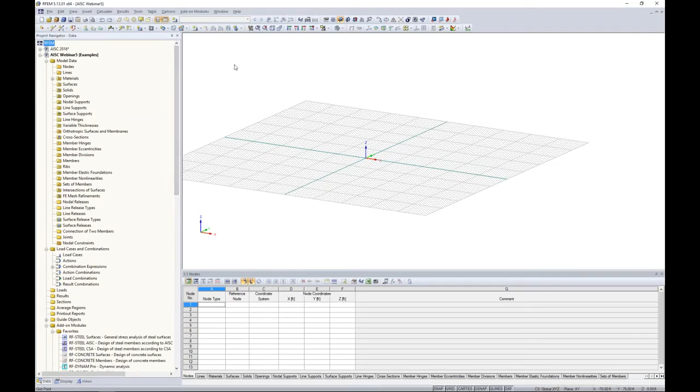So to begin with, we want to start off with drawing a truss. Now, we could normally go in and create our members individually and snapping to different points, but under Tools, Generate Model Members, we have several structure generators here: 2D frames, 2D trusses, 3D frames and trusses. We can even generate stairs. So we'll start off with a 2D truss.

And up pops our dialog box, and you'll notice that we have many different options when it comes to truss design. In addition, you can specify how the diagonals will be laid out, or our web members. So if we take a look at some of these different options, they will go ahead and update depending on which selection we've checked here. So we'll start off with this second selection, and our diagonals will be the default for this first selection.

The parameters is just our geometric information. The number of bays, we can set this as 6. The total length, which would be the span length, we'll set this as 50 feet. The total height is going to be measured right here at the center line. That can be set to 7 feet.

Now we have a couple other options here. We can lower the lower chord member here by a certain distance. For example, if we set this to 10 feet, you'll notice how this picture changes. Same goes for elevation. If we make some changes here, then our picture is updated for how our truss will be generated. So moving on, the cross sections and member types.

So we must define the cross sections for our chords, both upper and lower, as well as our diagonals and verticals, or our web members. The program's telling us that we need to create a new cross section. So for this, we will open up our cross section library. You can see here that we have many different cross sections. For today, we'll begin with the rolled sections, and in particular the HSS.

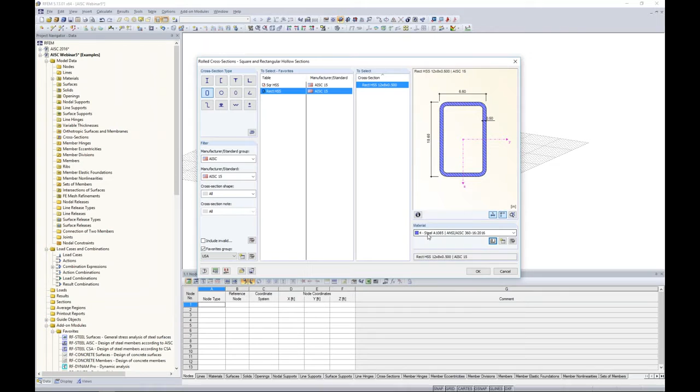So once I've created this material, I can choose it from my selection box here. We click OK, and we click OK once again. Now, that same material and cross section is populated for all of my members. Well, for the diagonals and verticals, I actually want to create a new cross section type, again under HSS, under my favorites group USA, and this time I want to choose a square HSS 5 by 5 by 0.375.

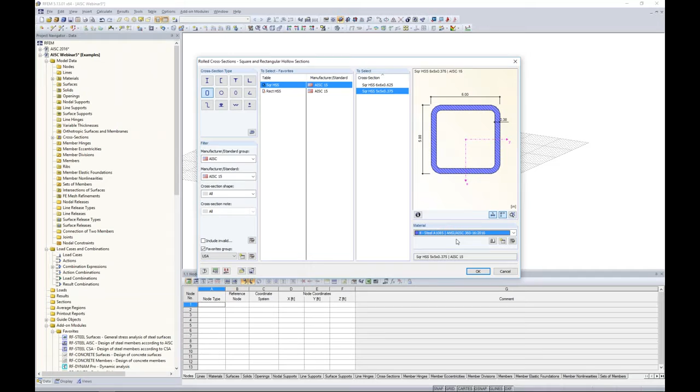I want to choose steel A1085 for my dropdown. You can see I accidentally entered it in twice here, no problem. We'll select the fourth material here, 1085. That will always be available now when I go to draw a new member because I've defined that material within this particular file. And I click OK.

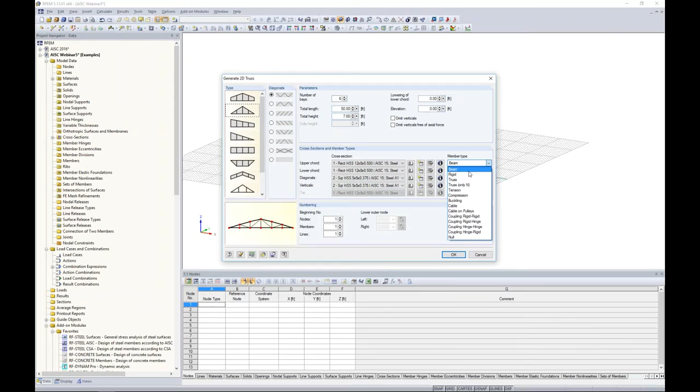For the verticals, we've already defined the 5 by 5, so now I can choose it from my drop-down box here as well. Regarding the member type, this is important because you can see here that we have many different members within RFEM. You can choose a beam member, a rigid, tension only, compression only, cables, because we are a nonlinear analysis program. So a beam member is going to be nothing special, just a typical beam or column.

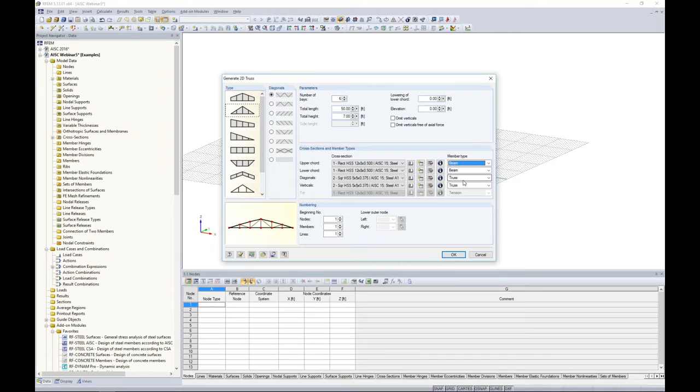But a truss member, which you can see the program automatically inputs here, is going to set a moment end release. So we're only transferring axial and shear forces. So that's just a quick application rather than manually applying those moment releases for our web members here. So once we're done, we can click OK.

And you'll notice that, as I said, our input material is listed here. The blue is what we're not using. So I input steel A1085 twice. All I need to do is to select that, hit the delete key, and now we only have one listing of 1085.

Okay, so moving on to the columns, I'd like to just draw a member as we would within our toolbar, a new single member. I want to define a new cross-section type, and I'm going to choose my rolled hot sections, but a W shape here. And activating my favorites group down here with my checkbox, I've added in some W10x members. So maybe I'm not totally sure which 10x member I want to go with yet, so I'm going to select one of these sections from my favorites group. We'll start off with a 10x88.

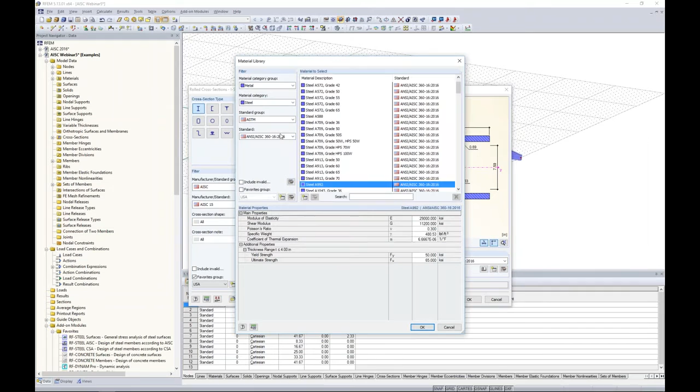Now, STEEL A992 is one of the defaults within the program. Currently, it's set to the 2010 standard. At some point when the 2016 is more widely used, we'll transition to the 2016 STEEL A992 to be default. But for now, if you'd like, you can utilize this just for consistency to change this from the 2010 to the 2016. So STEEL A992, we'll click OK.

The member hinges, we'll leave these as fully fixed. We'll see a little bit later on how to apply a moment end release. I click OK. Now, typically, I could snap from one point to the other to create my columns, but we have a nice feature here where all I need to do is specify the length and direction.

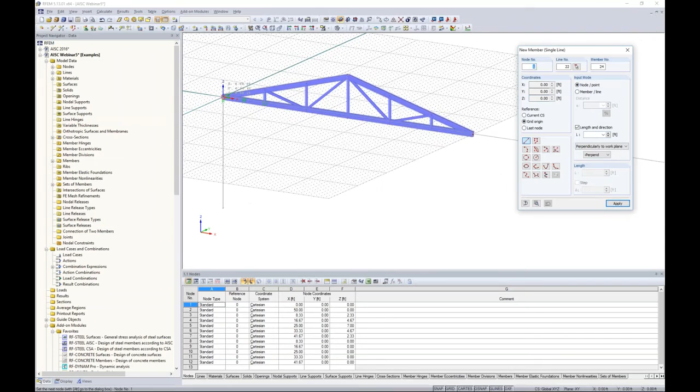So I'm going to specify my columns at 20 feet in height, and I want to draw this column member perpendicular to my current work plane, which you can see here in the negative direction. So now when I just snap to the end nodes of my truss and hit my right mouse key to escape, you can see that those columns were automatically drawn in the right magnitude and direction.

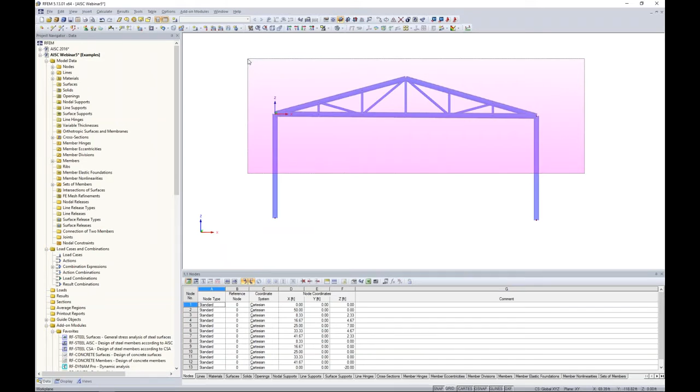Okay, so now that we have our first frame and truss drawn here, I'm going to use my selection box, and you'll notice that I'm paying careful attention to not select my nodes down at the bottom, and there's a reason for this. So just like in AutoCAD, with this selection box, we drag it over our frame, and I'm going to turn this into wireframe view and zoom in here. Holding down my control key, I'm going to unselect a couple of these nodes at either panel point on either side of the truss. Now you can't really tell graphically, but again, there's a reason why I'm doing that.

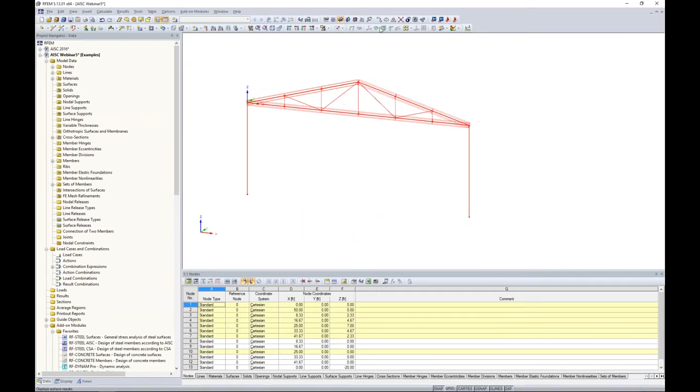So we're going to move on to the Move Copy tool. We're going to create 3 copies in the global Y direction of 20 feet. So Move Copy, nothing too special here. But under this option, Edit Expanded Settings, if we take a look at this, we can actually create lines between copied nodes. So this is why I was careful to highlight some nodes and not others. Now, even more so, we can assign a cross-section to those copied lines, or in other words, we're going to create members between the copied nodes.

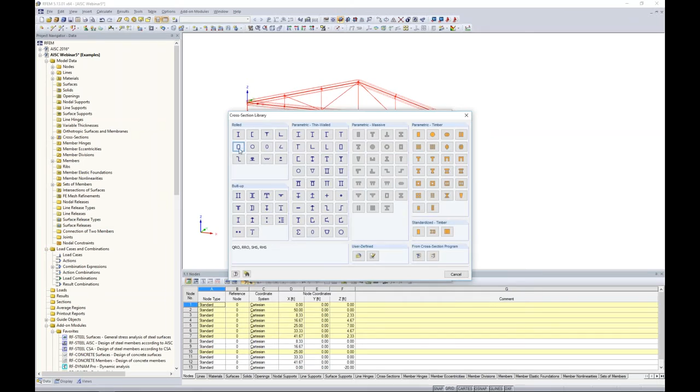Now, if you want to utilize one of the cross-sections already within the model, you can select it here from a template member, or we can access our cross-section database. This looks familiar from what we've seen before, and we can choose once again a new HSS member. This one will be a 6 by 6 by 0.625. From my drop-down, I can select my STEEL A1085 material. I click OK.

The member hinge, right now it's set to fully fixed, so that's what a beam type is. Now I could easily change this to a truss member if I'd like to release the moment by just simply changing the member type here, or you can always manually apply a member hinge. So by creating a new member hinge, you'll see here that we have 6 degrees of freedom, 3 degrees in translation, 3 in rotation. You can fully fix or fully release these. The program's making the assumption that you probably want to release the moment. We also have partial fixities with these spring constants.

So if you don't have fully fixed, don't have fully released, but somewhere in between there, then you can specify this spring constant for any one of the degrees of freedom. Lastly, we do have nonlinearity. So if we take a look here at the diagram, for example, and expand these details, we can account for things like tearing or yielding for our member ends. So quite powerful in terms of the nonlinear capabilities as well.

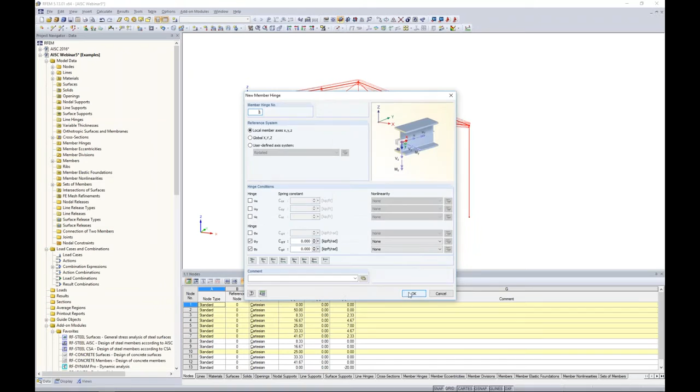For today, I just want to create, let's see, a moment release. So if I hit OK, that moment release will now be available. That's member hinge number 1, and I can select it from my drop-down for the member end as well. So I click OK through all of these dialog boxes. And you'll notice now that our structure was generated at the click of a button.

So turning this into rendered view, these were the members that were created between my copy nodes. So again, this is why I paid careful attention to select some nodes and not others. At the bottom chord, I don't have any lateral restraints here except at the midpoint, which you can see I left one HSS member bracing my bottom chord. So that's really it as far as the geometry for our structure.

Now we want to support it. So up in our tools, we have a new nodal support. We also have a line support for maybe the bottom of a wall. And next to that, we have a surface support for, let's say, a slab on grade if we want to apply soil spring stiffness. For today, we're sticking with the new nodal support. We have some defaults here: hinged, rigid, fully fixed.

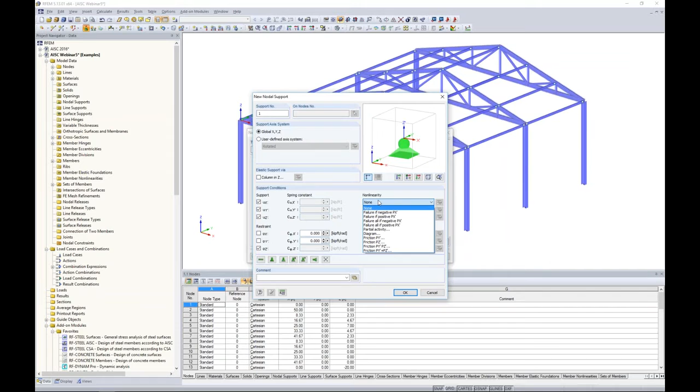We also have sliding. Of course, you can create your new nodal support definition, and this should look quite familiar. This looks like our member end conditions. We have our 6 degrees of freedom. We have partial fixity here, and we have nonlinearity to take into consideration if we'd like. Now, nonlinearity might be important for sliding or friction supports. For today, we will stick with one of the defaults, which is fully rigid.

I click OK. All I need to do is to rotate my structure around here, select the bottom nodes, and my rigid supports are applied. Now, if I think that, okay, the supports are maybe a little bit too big for this structure, what's nice is that I can always right-click on these supports to decrease the size. So now you can see all of them are a little bit smaller in size. And the same thing goes for loads applied to our structure graphically as well, just something to point out there.

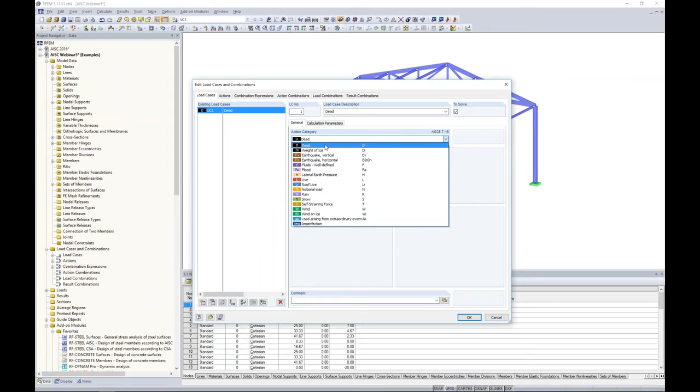Okay, so the geometry and the supports are completely done for our structure, so we want to move on to loading. For this, we want to create a new load case here, which is available in our tools. The first load case description will be dead load. The action category is set to dead. Action categories are important because the program needs to know what load factors to apply to which loads based on the ASCE 7 2016. The self-weight can automatically be accounted for within the dead load with this checkbox here. You can see -1 in the global Z direction. Our global coordinates are shown here.

Creating a new load case, we'll call this one live. The action category will be set to live. Self-weight will be unchecked here. For our third load case, we'll call this one wind 1. The action category will be set to wind. And for our fourth and final case, we can even just make a copy of this and rename it to wind 2. So jumping to combination expressions, you can see here that the program is going to automatically create 2 expressions, LRFD and ASD.

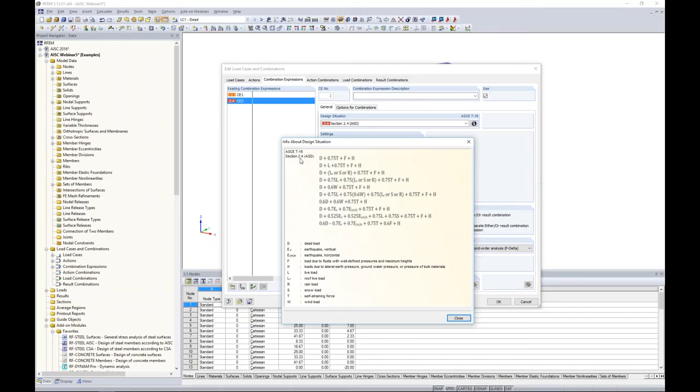Now, if we're curious to know what exactly the expressions are in relation to the code, we can click on this little info button here. And this will show us all of the ASD load combinations directly from the ASCE 7 2016 section 2.4. So to lay this out a little bit more clearly, we're going to jump to the load combinations. These are the actual load combinations generated by the program for both LRFD and ASD, only applicable to the load cases that we've defined. So here's where you'll see dead load, live load, wind 1, and wind 2. Lastly, we have our result combination. This is just an envelope solution.

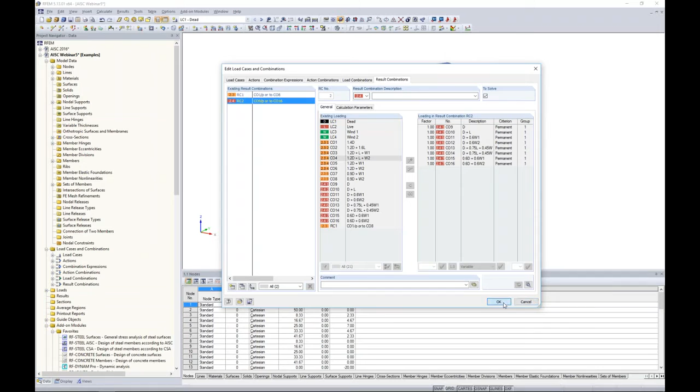So if we're looking for maybe the highest or the max or min forces on our structure, for all of the LRFD load combinations, we'd want to look at a result combination. We also have a result combination for ASD set here for maybe seeing what the worst case deflections are for all load combinations together. So once this is done, we click OK, and we're back in RFEM.

Now, utilizing this drop-down box, we want to make sure that we have the correct load case available here before we move on to applying loads to the member. Dead load, we're going to assume that just self-weight is fine for today's example. I'm not going to add on any other loads. So we'll scroll then to live load.

Now for live load, under tools, generate loads, we have the option here from area loads on members via a plane. The first thing that we want to define is the load magnitude in the global Z direction. The magnitude here will be -0.05 kips per square foot. Then we just need to graphically select our corner nodes. So the first thing to select would be over on the left side of the structure. We're going to choose one plane here.

Now I want to do the same thing on the right side of the structure, and what's nice is that I can do this all within one step. So now we have both planes defined on either side of the structure. We can remove the influence from either single members by individually clicking them, or we can choose a reference member so that all members parallel to that reference member will be excluded from this load.

So, for example, if I'd like to exclude these intermediate members between my top chords, all I need to do is just to select one of them. All of them are now not selected to be considered for the load. I click OK, and we can see here that the load is now shown graphically.

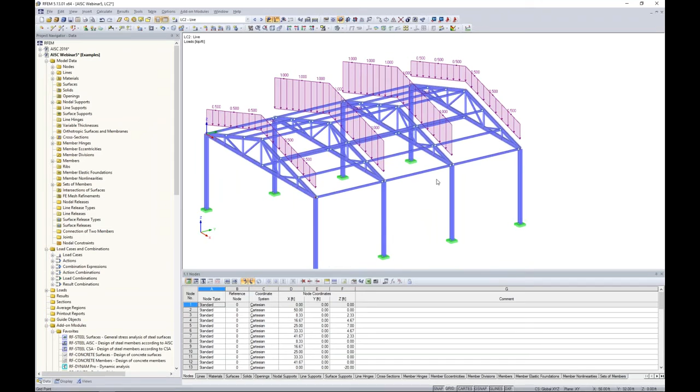Now, this is a pretty clean look, but if we're interested in how the load is being distributed to my members, I can right-click and display separately. So now we can see exactly what those member loads are based on their tributary area, and you'll notice that all of my intermediate HSS members were not taken into account. Moving on to wind load.

So for wind load, under tools again, we have generate loads from either snow loads or wind loads. For wind loads, we have vertical walls with roof according to the ASCE 7 2016. Now, same thing goes for snow load as well. The wind and snow load generators are for pretty general type structures like what we're utilizing today and what you see in this picture. Anything outside of these general structures will need to be accounted for by manually applying those loads.

So we want to put in here some velocity pressure and some other components that are important in terms of determining what the load should be according to the ASCE 7. We'll just go with the basic wind speed of 70 miles per hour. The building mean roof height, this can be set at 23.5 feet. The rest of the factors, we'll leave this as default.

So typically this would all be blank, empty, but the program remembers my settings from another model that I currently have open. So what I can do is just redefine the base geometry here, and we want to pay careful attention that we select it with how the program suggests here. So for example, the base geometry, I'm just going to select my 4 nodes at the base, and once I close this circuit, it will jump back to the dialog box.

And then for a duopitch roof, I'm going to select my 6 nodes up here at the top of my roof. Now, if you incorrectly define this geometry in some way, the program will gray out the OK here, so you won't be able to apply the load, and you'll know that you did something wrong with selecting the geometry. We can generate case 1 and case 3 from the ASCE 7. We also can take into account minimum wind loads from this standard.

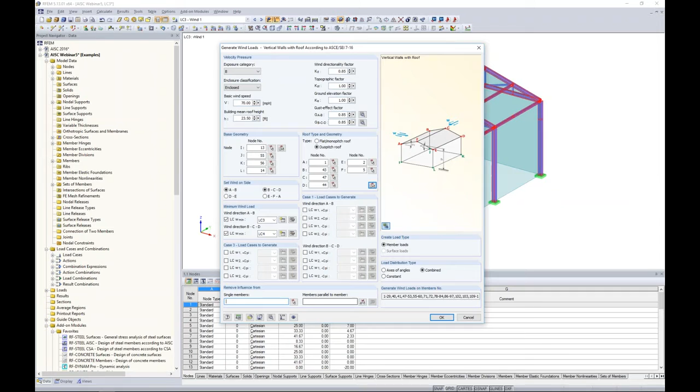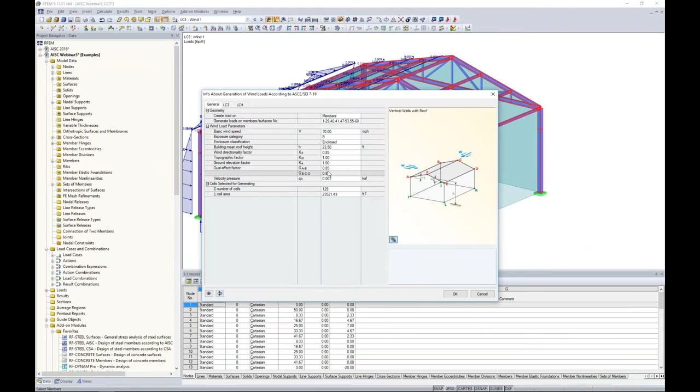For our case, if I graphically select here my web members, maybe I don't want the wind load to be attributed to these web members with my truss. So I just graphically select all of them. You'll notice they're now not selected in red. I click OK. I click OK, and now the program is going to give me some more information based on the calculations that were done.

I click OK, and now we can see these wind loads applied to the structure. This is for load case 3, and I can take a look at load case 4 from the other direction. Okay, so loading is complete. We can scroll through some of our load combinations to see how these are applied together. Now, not too many loads for today, but just know that loads can graphically be displayed here.

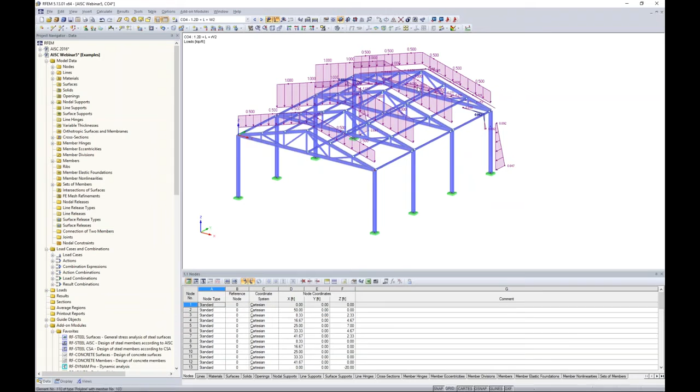So we're almost ready to run an analysis, but I do want to first jump back to the PowerPoint. So in the 2016 edition, the direct analysis method is talked about in Chapter C. And within Chapter C, we have several stability requirements. These would include member deformations, second order effects must be accounted for, such as P delta, P little delta, geometric imperfections, stiffness reduction, and uncertainty in stiffness and strength.

For the sake of time today, we just don't have enough time to go through each one of these. But what I will say is that most of these didn't change. We'll go over what did change. But I previously did a webinar on AISC 360 2010 steel member design in RFEM with a recorded webinar available on our website and on our YouTube channel.

What I did is I really went into detail on Chapter C to show you exactly how to take into account each one of these stability requirements within RFEM. So a very helpful webinar if you're looking at P delta, stability requirements in general, and how to apply that to the structure. For today, though, what I do want to mention is just a change that was made in the 2016 to the adjustment of stiffness in section C2.3.

Now, in the code, the AISC tells us that we must apply a 0.8 factor for axial and flexural stiffness. So it should be applied to all members that contribute to the lateral stability. Well, then it goes on further to say, well, I guess, avoid artificial distortions, let's go ahead and apply this to all members. Okay, no problem. 0.8 factor applied to those stiffnesses.

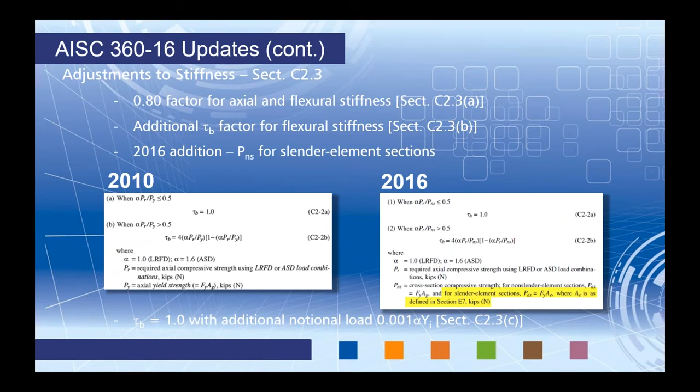Now, the code goes on further to say, hey, forget about all these equations, just apply the conservative factor, tau sub B equal to 1.0, if you want to apply some additional notional loads on top of that. And that's all explained in the standard, as well as I previously went over that in that last webinar. So how does that affect us for today?

Well, going back to RFEM, what I'd like to do is to select the entire structure. I'm going to right click, and under member, I'm going to choose edit. The modify stiffness tab is currently set to none. That's default.

If we choose this drop-down box, you can see here according to AISC 2010, tau sub B can be set to iterative. Iterative is going to use those equations from the standard to determine what our tau sub B factor is for each iteration. We can also just simply set this equal to 1.0, with some additional notional loads applied to the structure.

The flexural stiffness and axial stiffness multiplication factors, that 0.8 factor, will be applied here. The way our program is set up, the gross area is easily known from RFEM, but the effective area is not determined until much later within the steel module. So at this time, it's just a limitation of the program that we cannot account for slender members.

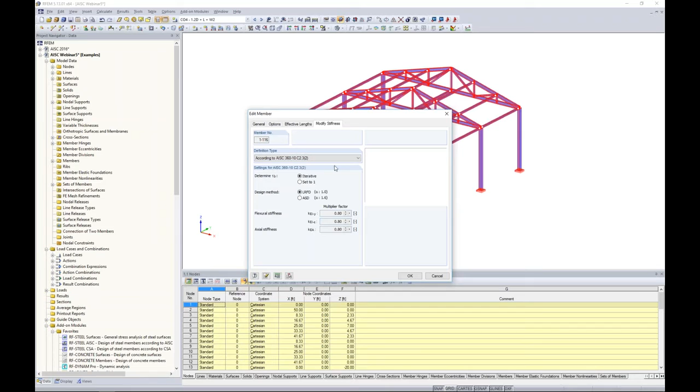Realistically, it's not too often that we're designing with slender members. It's definitely not unheard of, just not so common. So when you're not designing with slender members, nothing changes—you can continue to use the 2010 reference we've selected here. If you are designing with slender members, use this option for all the other members. For your slender members, you have two options: you can set this equal to 1 and apply those additional notional loads, or you can choose the multiplication factors here to manually apply your reduction in stiffness to those slender members only. That's just something to keep in mind. Today we don't have any slender members, so we can just keep everything as defined here.

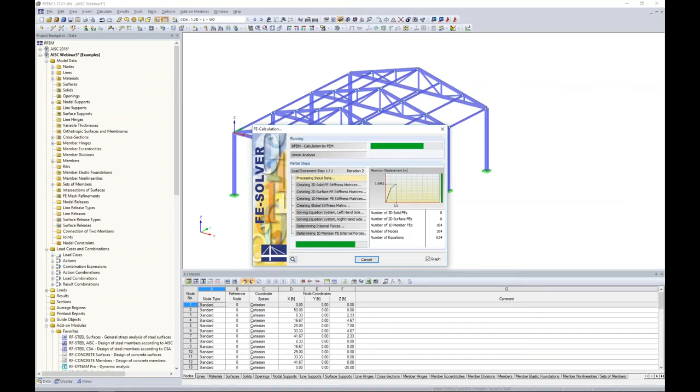Now we are ready to finally run our calculation. If I go to Calculate All, the program is going to cycle through my load cases and load combinations. It is a nonlinear analysis—we are taking into account P-delta effects and that tau b stiffness reduction. Finally, we'll be presented with our analysis results within RFEM.

Once this is done, as I mentioned before, the results tab is now available in our project navigator. The program immediately jumps to the deflections, so we can scroll through our load combinations to see how those deflections are changing based upon the different loads.

We are also probably interested in the internal forces. So I can expand this tree here, select members, and maybe take a look at my axial loads. All of the axial loads are presented to us here graphically.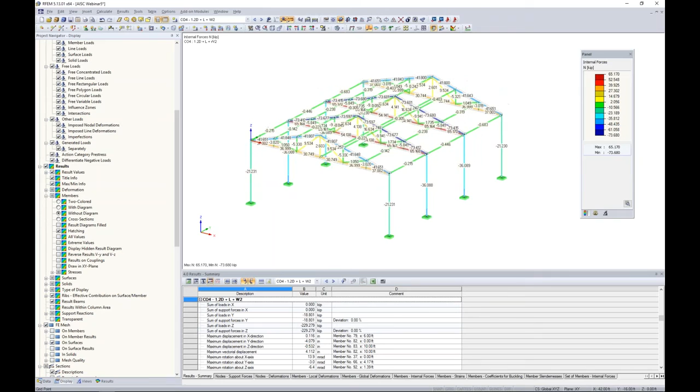Remember, you have a lot of control over how you're viewing these results in the graphics window. Under display, for example, there's this whole results section. So under members, if we want to change this to a color diagram, we can—now we have a colored panel. We can change this to more of a wireframe view with values written on it, or render the cross sections with colors as well. So again, very flexible in how you view your results, and you do have a lot of power over that.

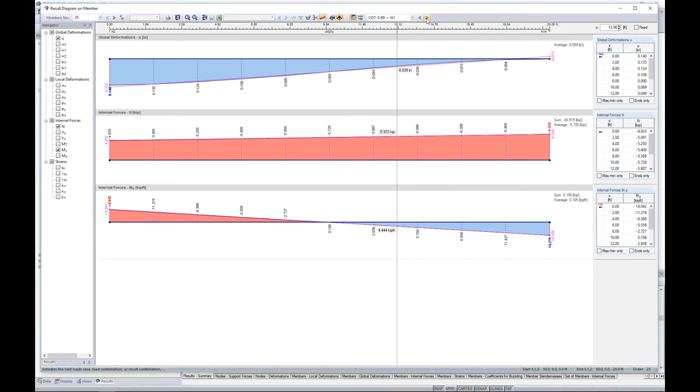For any individual member too, you can always right-click and go to the results diagram. The results diagram is just going to give us a little bit more information for our various forces and deflections along the member length. We can even add up these forces, we can average them out, add them to printout reports, and change the load cases and combinations here. So this is just a more detailed look at what's going on for that particular member.

Okay, I think that concludes the analysis portion. I did want to mention support reactions are of course all available here. So I want to move on now to the design.

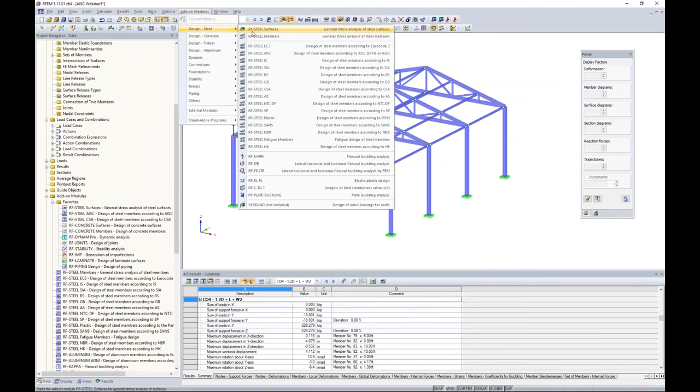I want to make the clear distinction that we are now entering into one of the add-on modules. The add-on module RF-STEEL AISC can be accessed here in our project navigator. You can always right-click on any one of these modules and select it as your favorite to move it up to the top of the list. Under the add-on modules drop-down box, we can access them here—they're categorized a bit better according to the various materials and applications, and we can choose RF-STEEL AISC.

So up pops our add-on module—it's nothing more than a dialog box. I don't have to worry about remodeling anything, redefining cross-sections, materials; all those internal forces, everything is brought into this add-on module.

All that we're doing is defining a little bit more information that's relevant to the AISC specifically in order to get that unity check from the standard. So what I want to first start off with is I'm going to rename this case.

I go to File, Rename Case, and we'll call this one Columns. Now, by all means, you can design all members together in one case. If you'd like to keep them separate, such as columns, top chord, bottom chord, you can create different cases for them. So for this one, we'll start off with our columns.

In the design, we have available here the 2016 edition, both LRFD and ASD. We also have the 2005 and 2010. So sticking with the LRFD 2016, I want to select graphically my column members.

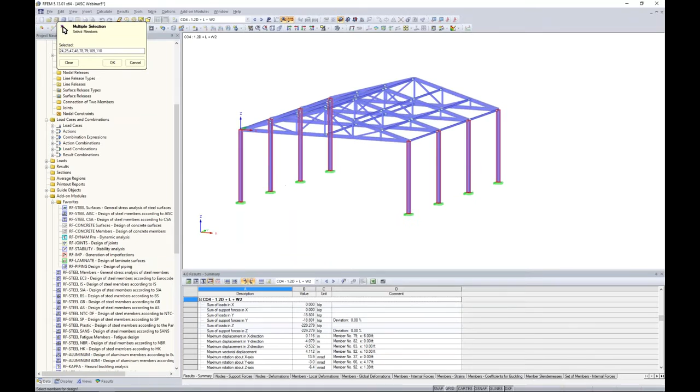So back in RFEM, I highlight these column members. I click OK. The ultimate limit state design, I must define which load combinations I'd like to consider. So I'm going to move all of my LRFD load combinations on the right side of this tab here. As far as serviceability, I'm going to move all of my ASD load combinations because we can account for serviceability checks as well.

Moving on down my list, my materials, steel A992 was automatically brought in. We don't need to do anything further here. Cross sections, same thing. W10 by 88 was brought in from RFEM, so we can continue to move on.

Intermediate lateral restraints. This is going to affect our unbraced lengths for lateral torsional buckling and torsional buckling. You can see here that we can define lateral restraints for our top and bottom flanges. We can increase the number along the member length.

And in turn, on this next tab, you can see that where that's going to affect those torsional buckling as well as weak axis unbraced lengths. But we'll get into that in just a minute. So if you do have some type of bracing for the top and bottom flange, you can apply that here.

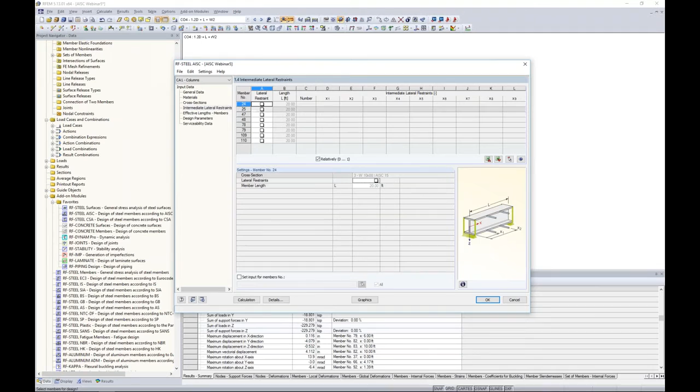Now, currently in development, and we hope to have this released soon at some point in the near future, is the ability to define top flange versus bottom flange versus both flanges versus no flanges braced for our intermediate bracing. Right now, you either need to consider all of them braced or none of them braced. So again, we hope that improvement will be available soon. Now, we don't have this consideration today for our columns. We'll assume that there's nothing bracing the top or bottom flange.

Effective lengths is going to be our stability checks. We have our strong axis bending here, or buckling. We have our weak axis buckling, torsional buckling, and lateral torsional buckling.

Now, because we are designing these members per the direct analysis method in Chapter C, the code tells us that we can set the effective length factors equal to 1.0. This is in contrast to the effective length method in Appendix 7, where you do need to adjust those K factors. So moving on with Chapter C, then, we can leave these all as default as 1.

Now, the unbraced length is going to default to the full member length. Unbraced lengths are incredibly important because they really do affect our design. So the software is only as smart as what you model. So it's going to default to the full member length.

Now, if we had some additional members in here that we would consider braced in either the strong or weak axis, we would want to adjust the unbraced length. And we'll actually do that with our next case later today. For both strong and weak axis, I'm going to assume that it is the full length, the full 20 feet for my unbraced length for both buckling, torsional buckling, lateral torsional buckling. So we can move on.

The design parameters are going to be some additional variables. For example, our C sub B factor, which we can see that's default set to 1.0, which is a little bit more conservative. We can change this to equation F1-1. Or you can manually override this. We also have some additional variables here. These are just important for some of the various equations in the AISC.

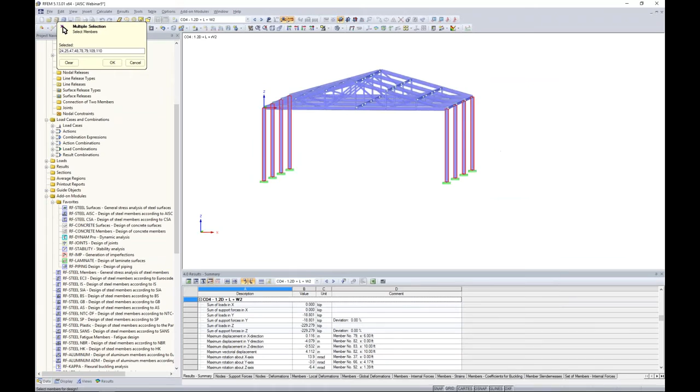Serviceability data, so this is how we check our deflections. The first thing I want to do is choose member from my drop-down box, and then graphically I can go back into RFEM and select my columns. I select these columns, click OK, and now each one of those members is listed here.

The reference length is again going to be the full length of the member, the 20 feet. We can add in a pre-camber if we had one for deflection considerations. And then the beam type needs to be set to either beam or cantilever.

So the question is, we've identified how we're going to compare these deflections, but what exactly is it going to be compared to? What is my limiting deflection ratio? Under the details tab, we have our serviceability input here. You can see that the limiting deflection is set at L/360 for simply supported, L/180 for cantilevers.

Now, by all means, you can override this information as you see fit for your limiting deflection ratios. The deformation is either relative to the shifted member ends or the undeformed system. With the shifted member ends, the deflection will only be measured from the new distorted shape of that member and its member ends. In comparison, with the undeformed system, the deflection is measured from the original structure location before any loads were applied. This can give very different results, and it's up to you as the engineer which deformation you'd like to measure. We'll keep this first case as the shifted member ends.

I click OK, and I'm ready to run a calculation. You see that it solves within a split second, and that's because we already have our internal forces from RFEM. All that we're doing is applying these equations from the AISC to give us our unity check.

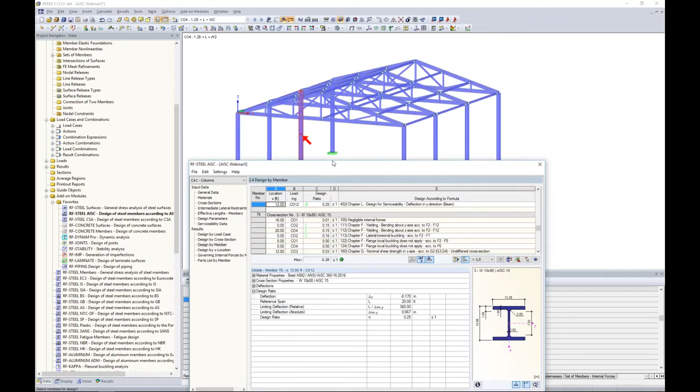Even more so, you'll see this big red arrow. That red arrow is pointing you to the location of the controlling internal force for that particular check. So if we're looking at member number 79 here, you can see we have all of the code checks for each chapter listed - chapter F, chapter G, chapter E, and H.

For each one of these, if we go to lateral torsional buckling, for example, you can see the cross-section type listed and how it's classified, whether non-slender, slender, compact, or non-compact. We have all of the variables that go into determining that lateral torsional buckling unity check, along with the code references. So it's very clear in understanding where the program came up with its numbers. It's definitely not a black box.

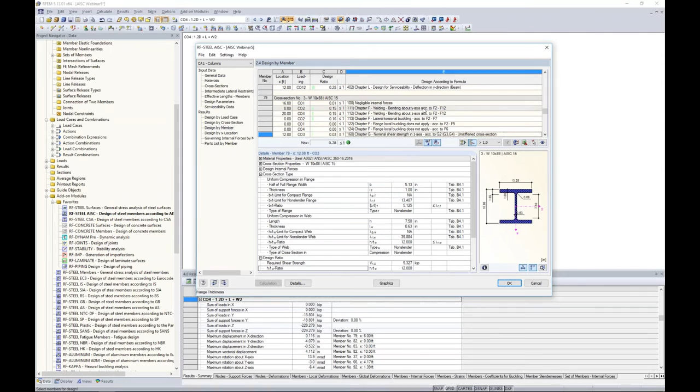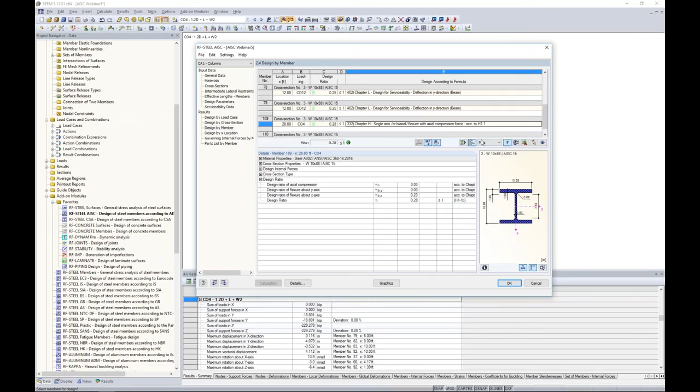Now, this is great, but you might say that's just too much information - I'm only interested in the controlling single code check for each member. Well, that's fine, you can easily filter according to the max. Once I hit this filter button, it's only going to give me my controlling equations, which you can see - serviceability, for example, controls for a lot of these, and chapter H for member number 109. That way you're not filtering through all of the code checks.

We also have the material takeoff available here. Now, going to the graphics view, this will display our results. We're still technically in the add-on module RF-STEEL AISC, but we're viewing everything back in RFEM. With this drop-down box, you can see RF-STEEL AISC is selected, and we can take a look at our ultimate limit state design.

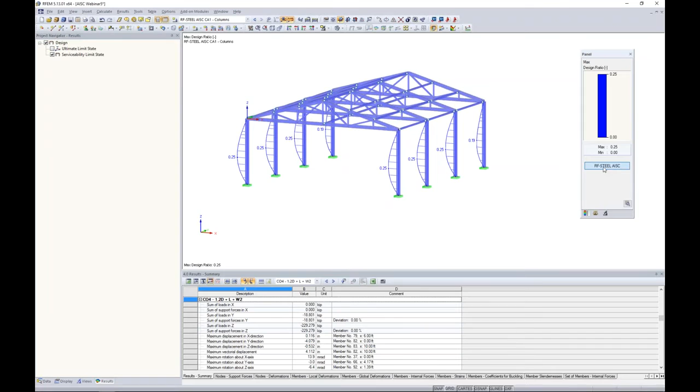So just taking a look at those code checks, we can also take a look at serviceability, which it looks like most are 0.25, for example, and controlling at the midspan. Jumping back to RF-STEEL AISC, that really shows you the results for just our columns designing our members.

Real quickly, I just want to mention optimization. Back under the cross sections, you can see here that the W10x88 has our max design ratio listed after we solve for it, 0.28.

Now, we can optimize. The default is set to no, but we choose this drop-down box and we have a couple options here. You can optimize from the current row, meaning the program is going to choose any W shape from the AISC section.

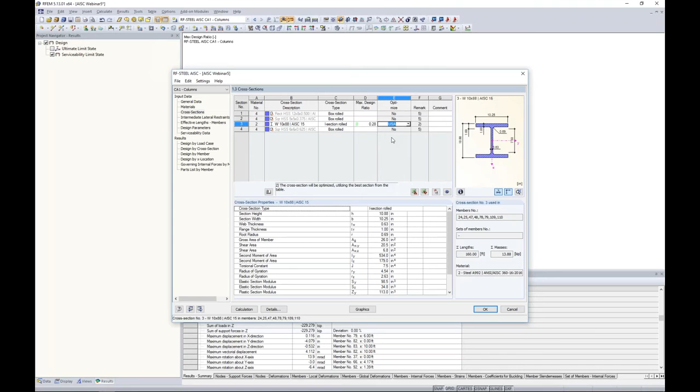The other option is to choose one of your favorites list. So remember way back when we first drew this column, I had my favorites list USA with about, I don't know, 7 10-by shapes. So with this favorites USA now, if I want to optimize from just those 10 or so shapes, those W10-bys, then I can choose this option. I can hit calculate.

Now what the program is going to do is it's going to kind of give you an estimation based on the old internal forces with the old cross section and say, well, I think approximately you should get about 0.54. So that's a little bit better than 0.28 or whatever we were seeing before. But you'll notice here that this is highlighted in blue, and this is telling you the cross section in RFEM is different from the cross section in this module.

So what you need to do is to right click and export this cross section back out to RFEM, rerun your analysis so that we get the true internal forces based on the correct stiffness with our new shape. What it's showing now is just an approximation. That's why it's highlighted in blue. In turn, I can right click and import the cross section from RFEM to bring back in that W10x88. So that's what I want to show you for this first case and design of columns.

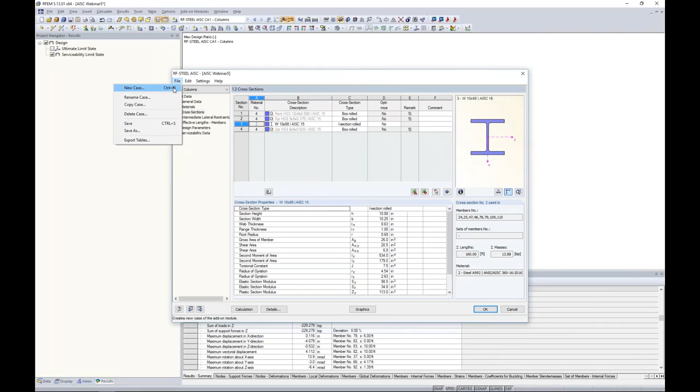Next, I'd like to create a second case. So we'll go to File, New Case, and this one we will call Bottom Chord. I click OK. It's asking me to save changes to my original case. That's fine. So now you can see I can easily toggle back and forth between either case. So that's why sometimes it's nice to keep them in separate cases if you want to design sets of members separately.

So for this next case, what I'd like to go into a little bit more detail is the design of members versus sets of members. Now, ultimately, we're going to end up with the same results for members versus sets of members. It's just a different approach, and I think that there are some advantages to sets of members over members. So what we'd like to first define here, LRFD 2016, that's fine.

And I'm going to select here, rotate my model. I'm going to zoom in and select my individual members for my bottom chord at this second frame. Oops, not that member. And I click OK. In turn, I'm going to select a set of members. So a set of members was automatically created by the program when I generated these truss members. You can see here there's a faint dotted line around all of my bottom members for this bottom chord. That's called a set of members. I select it, I click OK.

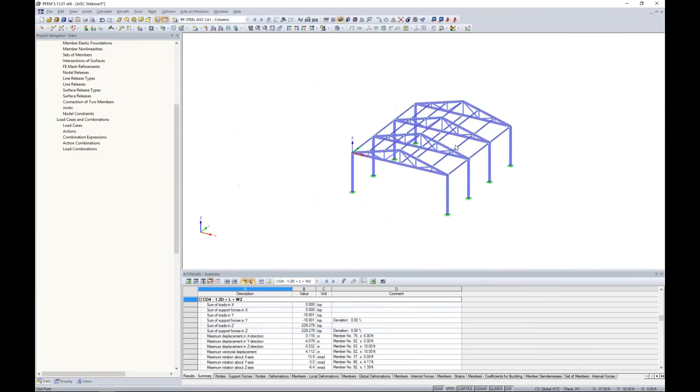Let me quickly jump back to RFEM to explain what a set of members is further. So the program automatically created those sets of members, that was done for both the bottom chord and the top chord. So if I zoom in here, here's this faint dotted line around the bottom chord. Now the top chord, if I highlight this faint dotted line and select it, is the entire top chord. So this can actually be designed as one continuous member.

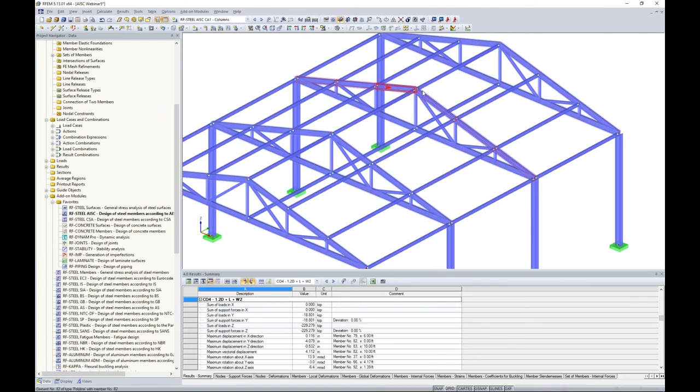Now, what's very powerful about sets of members is it doesn't necessarily have to be in a straight line. So it does need to be in a single plane though, but it can have several bends to it. A great example, of course, is this top chord, but we could even design this column, this top chord, and this other column as one continuous member if we wanted to with a set of members. Now, the program automatically did that for us.

Just to let you know, you can hold down your control key, select several members, right-click, choose the option Create Set of Members, and that's how we can generate a continuous member here with that dotted line around all of them. So we're not doing that with these members, but jumping back to my current module here, which is the RF-STEEL AISC, and my bottom chord, that's kind of the difference in selecting members versus sets of members.

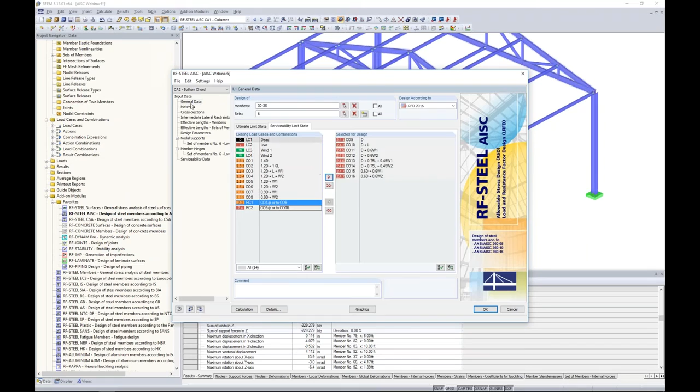So again, I want to choose my LRFD load combinations for ultimate limit state design. Serviceability, we will choose our ASD load combinations. Moving on down the list to materials. So we had chosen Steel A1085 for HSS members.

Now, this is now recognized in the 2016 spec as an approved HSS material, as I mentioned before. Now, with A1085 and A1065, these have more stringent wall tolerances than the previous A500. So what this means is that the code tells us we can now use the full nominal wall thickness for design. This is in comparison to the A500, where we had to use 93% of the thickness.

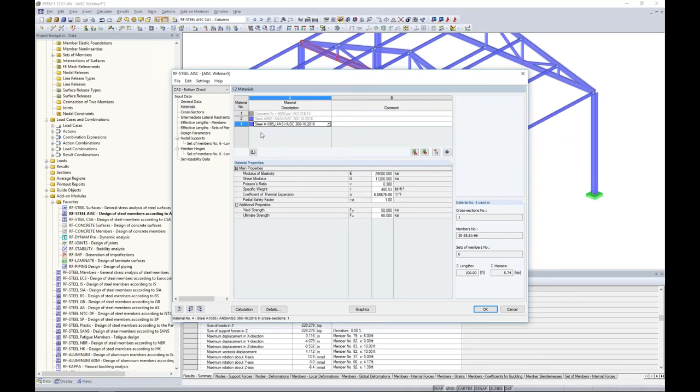So how do we account for the full nominal thickness with this new material? Under the Details tab, you'll see here a section, Design Wall Thickness of HSS. Here is where we can uncheck this option so that we don't reduce the nominal thickness for HSS according to B4.2. So when using the A1085 or A1065, we can account for the full thickness.

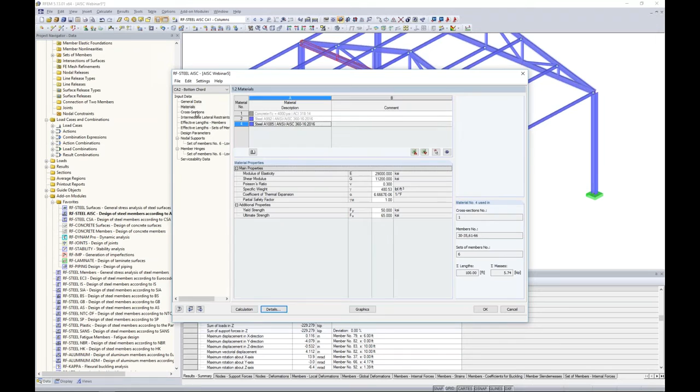Cross sections, HSS 12 by 8, brought in from RFEM. Intermediate lateral restraints, same concept as before for both our members and sets of members. Now we don't have any top or bottom restraints here for HSS members. It's just not relevant, so we will continue to move on. So effective lengths for members, we also have effective lengths for sets of members. So we have two separate tables here.

So looking at our members, you'll see that the buckling length for strong axis, weak axis, and both our torsional buckling and lateral torsional buckling are set to 8.33. This is incorrect. Again, the program only knows how the information is input into the model. So this is why it's incredibly important to pay attention to unbraced lengths. I would argue that for this bottom chord, the unbraced length for the strong axis is the full 50 feet. I don't have any columns bracing the member below it, so I'd like to account for that full length.

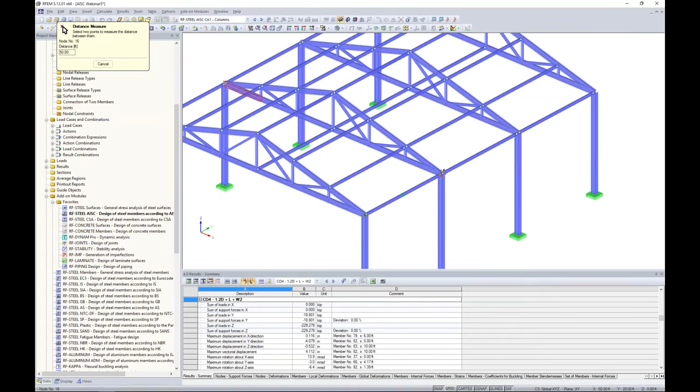Well, what I can do is to graphically measure the full 50 feet here from end node to end node. The program will calculate that up as 50 feet. I can scroll down to my next cell and hit the F8 key to copy that input for every single member. Now, for my weak axis direction, I would say that this is most likely 25 feet.

Remember that we left in this intermediate HSS member bracing it in the weak axis direction at the midpoint. So again, we can use our measure tool here from one end node to the center. That populates as 25 feet. Using my F8 key, then I can enter in that information for all of those members.

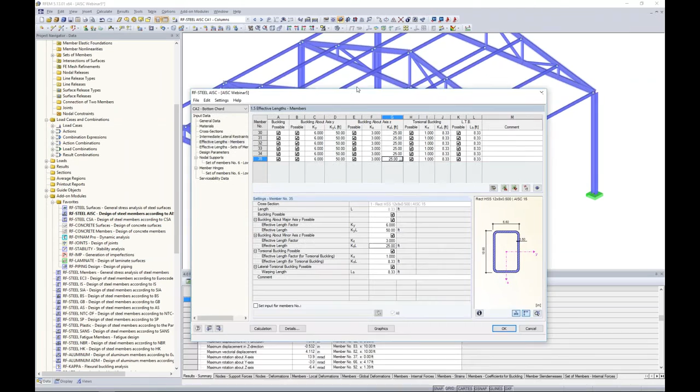Now, as for torsional buckling and lateral torsional buckling, again, this depends on your connection types, so it's really up to the engineer's discretion. I might say in this type of scenario that this small HSS member is bracing it for both torsional buckling and lateral torsional buckling as well. So what I can do, just like what we do in Microsoft Excel, highlight all these cells, hit Control C, and I can Control V and paste them into the adjacent cells. Same goes for lateral torsional buckling.

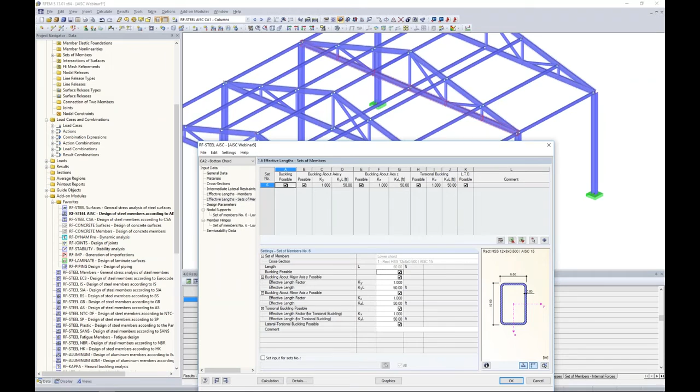So now that we have set all the unbraced lengths for our members here, we want to move on and do the same thing for sets of members. Now we have one single set of members listed, and the program defaults to the full 50 feet in length. Now we can manually override this, but what I'd like to do is to jump down to the nodal supports here. This was not available previously with just members. It's only available with sets of members. And this is where a big difference comes in for members versus sets of members.

With a set of members, because we don't require it to be in a continuous straight line, the program will actually run an internal eigenvalue analysis for this single set of members. This will in turn come up with the buckling modes for that particular set of members and a critical buckling moment. So instead of weak axis buckling, strong axis, torsional buckling, lateral torsional buckling, we're going to forego all that for sets of members according to the AISC, and instead we're going to run an eigenvalue analysis, which is a much more theoretical approach to come up with a critical buckling moment to take the place of that. So it's just more accurate.

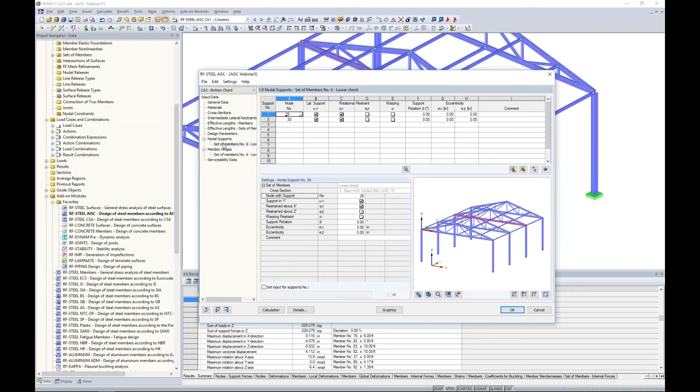So for this, with our nodal supports, you can see here our set of members is highlighted. I can zoom in here and change this to my local coordinate system. So for my eigenvalue analysis, the program has to support these members internally for this quick little, I guess, on the side analysis to determine what our critical buckling moment is.

It automatically places these supports at either end. Each node along the set of members length has 4 degrees of freedom. The lateral translation, you can see here, we also have some rotational restraint, and we can even take into account warping. For example, if you have warping, we can check this checkbox, go into the details here, and account for warp stiffening such as an end plate.

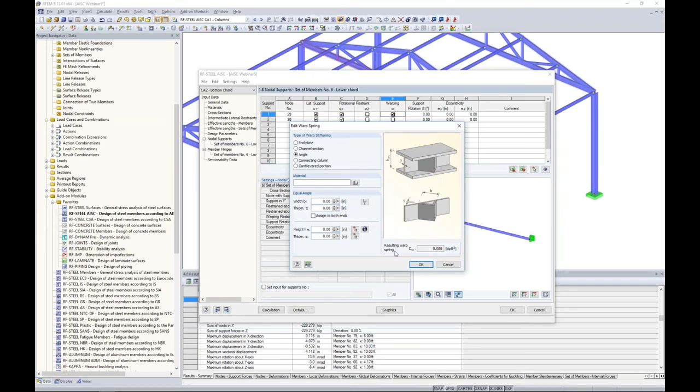Maybe you have a channel section or an angle. We just specify the material here, we specify the geometry of the warp stiffening, and the program will calculate a resulting warping spring. So I click OK out of this, and what will happen is we'll get a warping spring here that will automatically be accounted for within the eigenvalue analysis to give us a higher critical buckling moment. So pretty powerful for sets of members versus what we don't have for members.

Now, for this particular set of members, remember we have an intermediate HSS framing into it. So what I can do is just graphically select that node back in RFEM. I do want to brace it laterally, and I want to apply a rotational restraint. Now, each one of these has its own local axes as well, X prime, Z prime, Y prime, which are mentioned here.

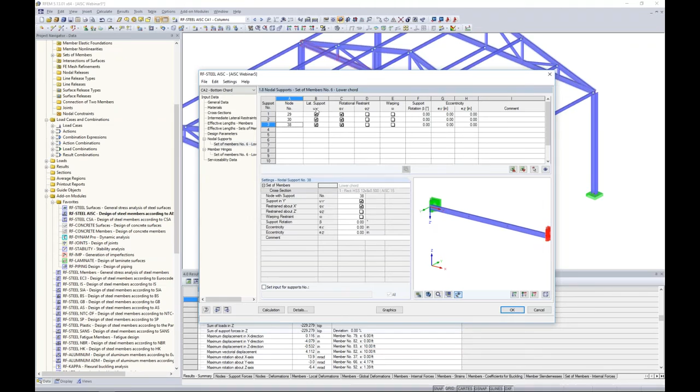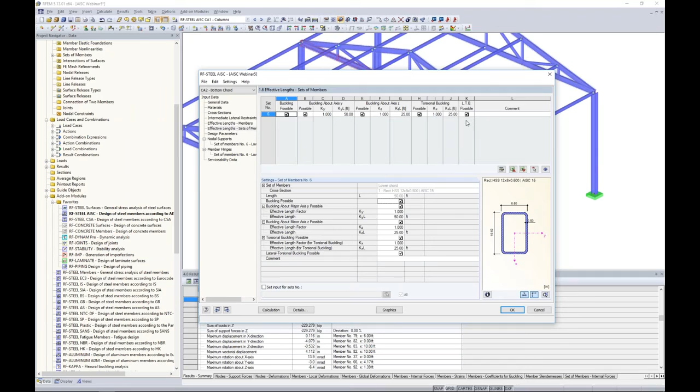Member hinges, same type of concept. If you had any member hinges along the member length, such as shear releases, moment releases, warping releases, you can account for them here, which will affect our eigenvalue analysis. So jumping back up to the effective lengths for sets of members, you can see now the buckling about the weak axis was automatically updated to 25 feet. Torsional buckling, 25 feet. Lateral torsional buckling will be automatically calculated based on the eigenvalue analysis.

Design parameters, nothing new here. These are just the various variables that go into play for our equations. Lastly, serviceability data. So the question here is we want to compare serviceability for both our members and sets of members. The first thing we want to do here is choose member, and then we can graphically select those bottom chord members just as we previously had done to check the serviceability. I click OK. Now the reference length is set to 8.33. We actually want to override this here and set this to the full 50 feet.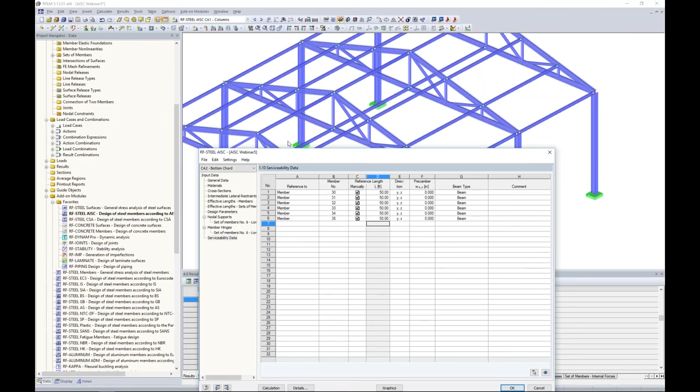Now again, I can just simply measure back in RFEM at the click of 2 buttons. I hit my F8 key, and now that will set the reference length to the full 50 feet for each one of these members. For my set of members, I'm going to choose that from my drop-down box and graphically choose my set of members. I click OK. This is set to 50 feet by default, so that's great. So now we're kind of comparing the same thing here. We should come up with the same serviceability check.

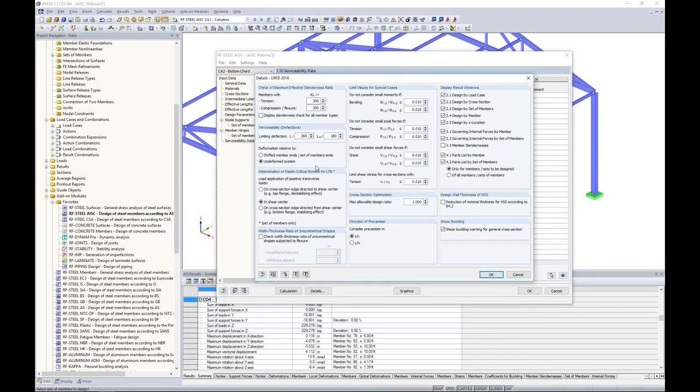But the one thing we do need to do under the details button is change this option here, the deformation relative. We cannot use the shifted member ends. That's just not comparing apples to apples. We have to use the undeformed system. Otherwise, we're going to get extremely different results. So in order to compare sets of members versus members, we have to compare that to the undeformed system, and I click OK. So now I'm ready to run my calculation.

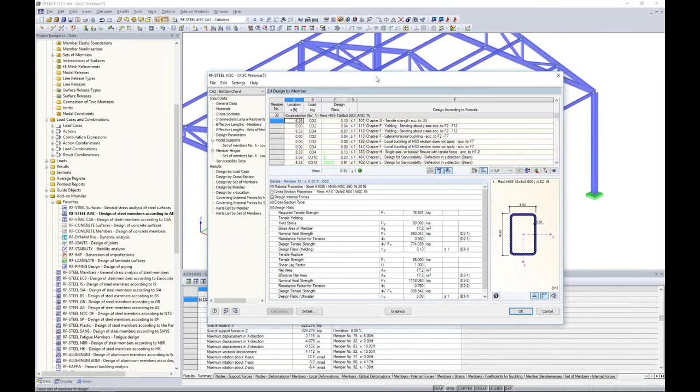Again, it solves within a quick second, and you'll notice here that I have my results, again, available according to the load case, according to the cross-section, which we only designed for one cross-section, but we also have design by sets of members and design by member. So two separate tables there. If we're looking at design by member, we already went over most of this, but I did want to show you, if we take a look at one of these HSS members, this section here, lateral torsional buckling. This is a brand new section to the 2016 edition for HSS members. So let's jump back to the PowerPoint to discuss that a little bit further.

So this is under the section HSS, lateral torsional buckling, section F7.4. So LTB considerations were added here, which is new to the 2016 standard. They are dependent on unbraced lengths. So this includes the manual unbraced lengths that we entered in, our L sub B, and then L sub P and L sub R are our limiting bracing lengths, which are calculated according to our cross section. Now, depending on where you fall within that range, that's where your nominal flexural strength is going to be calculated, and it could vary depending on where you fall.

So what's really great about RFEM is that not only have we added this section here per the 2016, but we also give you all of this information such as Lb, Lp, and Lr. So you can find out exactly where you fall within this range.

Then we'll be given our nominal flexural strength, M sub n here, according to F7-10, which correlates back to the standard F7-10. The code does have a user's note saying essentially lateral torsional buckling probably won't control in most cases for HSS. Realistically, deflection will usually control, and that's definitely the case with our model today. Lateral torsional buckling is really low, and serviceability is a much higher code check. So just something that's interesting there.

So going back to the model, we can see here again that lateral torsional buckling. Now, if I go to my sets of members, and we only design for one set of members, I don't see lateral torsional buckling here. And that's simply because, like I said, we forego those analytical equations from the AISC, and instead, under stability analysis, we run our eigenvalue analysis to come up with the elastic critical moment for lateral torsional buckling.

You can see the amplifier that was determined here from that, and we come up with 6,400 kip feet, which is incredibly high, but that's what our stability checks are going to be compared to. Now, in reality, what ends up controlling in this case would be yielding from our strong axis, which is 255 kip feet. But that is a huge difference between sets of members versus members. So something to keep into consideration there. Again, all the code references are listed here.

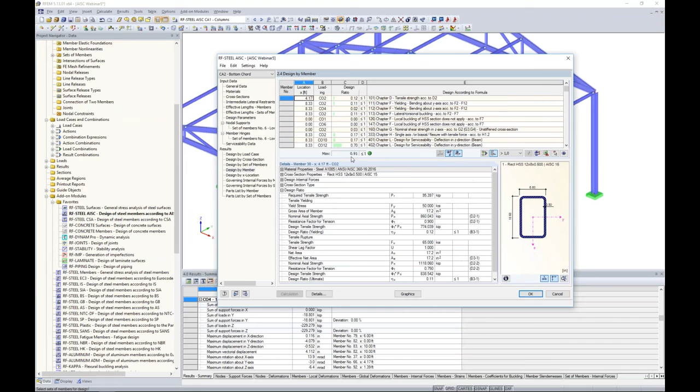Okay, so we can take a look here at the various code checks in our table. I think we see members versus sets of members. We do get the same code check. What we can also do, though, is view the information graphically. I think this is a little bit easier to compare to make sure that we are getting the same results. So what I'm going to do is highlight those bottom chords by holding down my control key. Maybe I create up here in my tools a visibility by selected objects, so now we can clearly lay this out.

Well, this looks like our serviceability limit state design according to our add-on module, and the results are identical, which is exactly what we would expect. Same thing goes for the ultimate limit state. We can see here we have these same numbers along the length for both bottom chords. So again, different approaches, but you should come up with the same results. But you have to pay very careful attention to things like unbraced lengths.

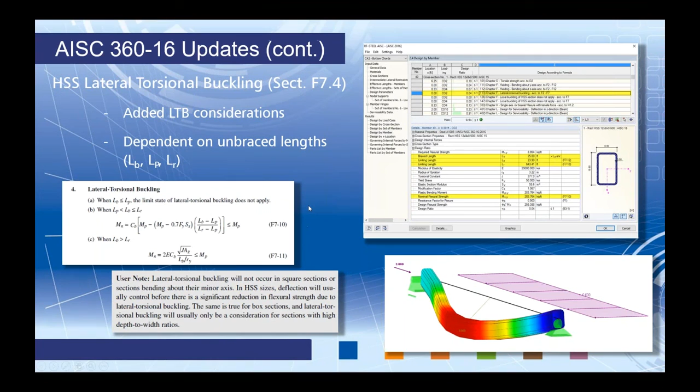Okay, so that really concludes our structure today, but there are several more points that I wanted to go over according to the 2016 updates that we just simply don't have these members available in our structure today. So this is definitely not an exhaustive list, but I just wanted to point out some of the changes that you'll see within the add-on module RF-STEEL AISC in reference to the 2016 edition. For example, members with slender elements in section E7.

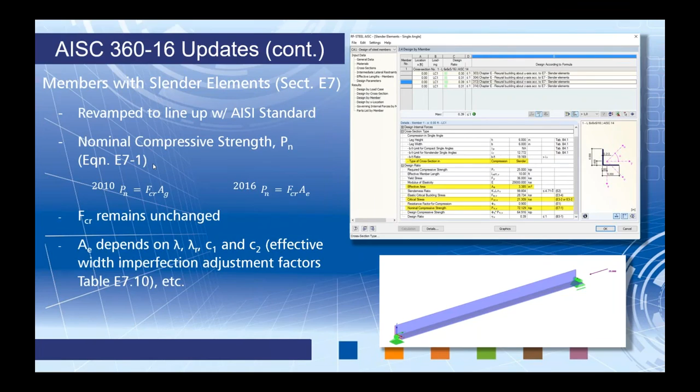If you do have a slender web, you can see the program gives you that information that it's classified as slender, and then we'll see some things here like reduction factor, the buckling stress, and ultimately the nominal flexural strength from section F7.

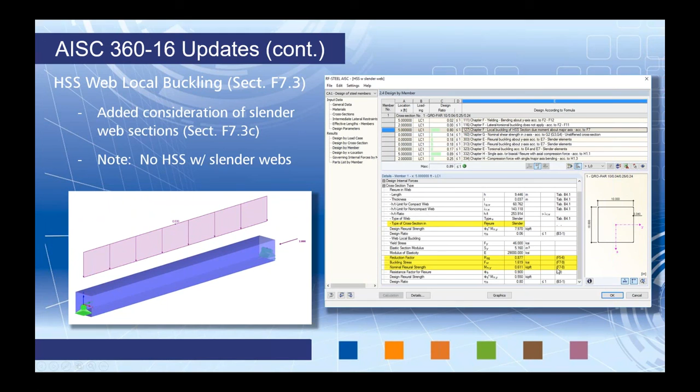T's and double angles, this was another major revision in section F9. Here, the lateral torsional buckling was revised in section F9.2, and in particular for stems and legs in tension. Here, the code has added unbraced length consideration. So this is similar to our HSS sections. Depending on where you're falling within this range with your unbraced length, well, then that's going to adjust the equation being used. Again, for my example here, you can see just a simple T section, and chapter F is listed here with lateral torsional buckling.

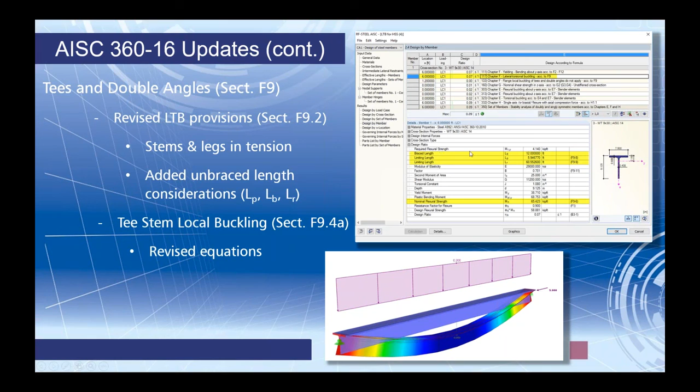We're going to lay out for you the brace lengths and the limiting lengths Lb, Lp, and Lr, so you can see where you land within that scenario. And then the nominal flexural strength will be given here. Now also the T-stem local buckling according to section F9.4a, there were some revised equations here. So if you're running the 2010 versus 2016 in the module, you're going to see slightly different results available there.

Okay, so lastly, chapter H for our interaction equations. It is noted here that all throughout this chapter, there is the reference to required strengths. You can see in my example here, required axial strength, required flexural strength. Well, after all of these required strengths is the small note here: determined in accordance with chapter C. You'll remember that chapter C is our direct analysis method. I think that this is a pretty big milestone.

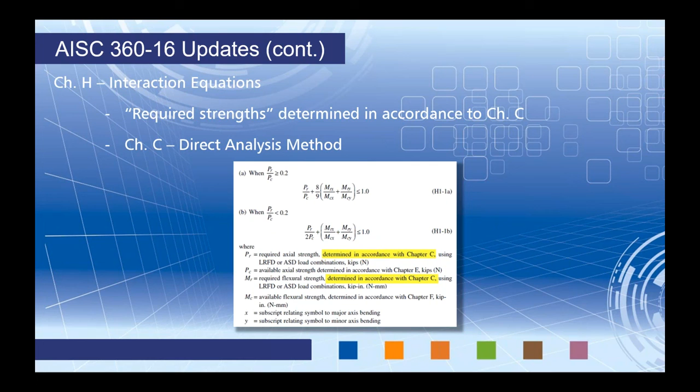Previously, the direct analysis method was never really differentiated much from the effective length method, but now in the 2016 version, this really seems like this is the way that the AISC is pushing engineers to determine what our internal forces are. So again, I think that's why that previous webinar that I did, according to the 2010 version, because realistically nothing changed within that chapter except for the small section for stiffness reduction, will be extremely useful, as this seems to be the way that the AISC is headed.

Okay, so that concludes the webinar for today. I know that was an incredible amount of information at one time.